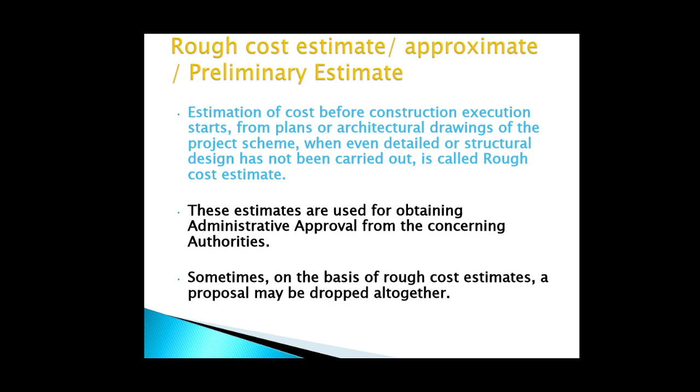Sometimes, on the basis of rough cost estimate, a proposal may be dropped altogether. It is very important to give the rough cost having variation in between 5 to 10%. If it has more variation, it may be dropped out because of higher cost.

Method of preparation of preliminary or approximate construction cost estimation for studies of various aspects of work of project and its administrative approval is discussed. This estimate can decide, in case of commercial projects, whether the net income earned justifies the amount invested or not. The approximate estimate is prepared from practical knowledge and cost of similar type of works.

The estimate is accompanied by a report duly explaining necessity and utility of the project, along with a site or layout plan. A percentage of 5 to 10% is allowed for contingencies, meaning in execution work there may be some unforeseen conditions like weathering conditions or shortage of material or labor. For that, 5 to 10% variation is acceptable.

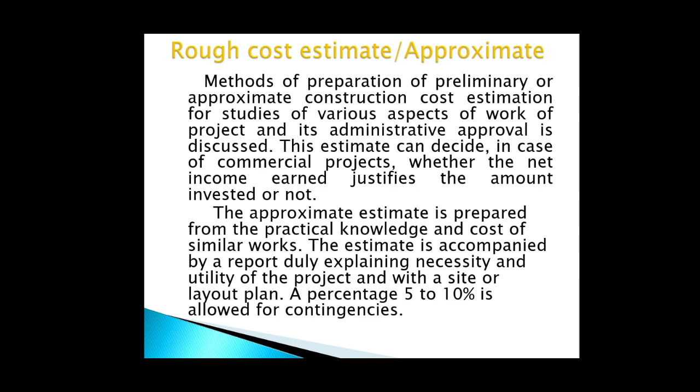The methods of approximate construction estimate are as follows. First is plinth area method, which as the name suggests depends upon the area of construction. Second is cubical content method, in which area as well as height, the third dimension, is also considered for calculation. Third is unit based system, in which units of calculation are considered, such as number of beds, number of students, etc.

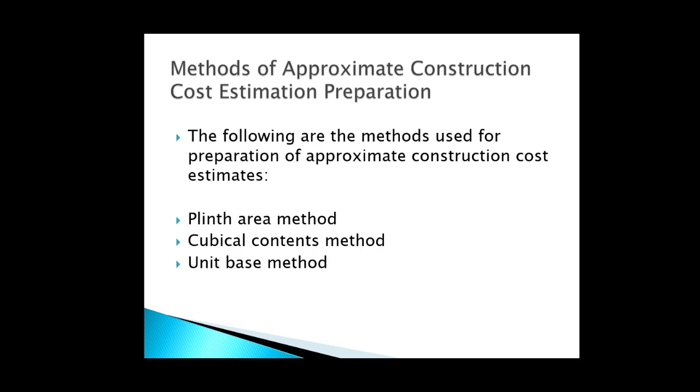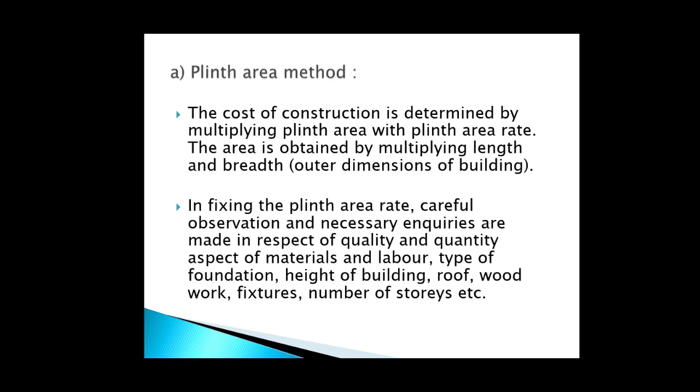We will discuss first about plinth area method. The cost of construction is determined by multiplying plinth area with plinth area rate. The area is obtained by multiplying length and breadth, that is outer dimension of building. In fixing the plinth area rate, careful observation and necessary inquiries are made with respect to quality and quantity aspects of materials and labor, type of foundation, height of building, roofing, woodwork, fixtures, number of stories, etc.

The example on plinth area method: prepare approximate estimate of a public building having plinth area equal to 1800 square meter, and the data given is plinth area rate at rupees 3500 per square meter.

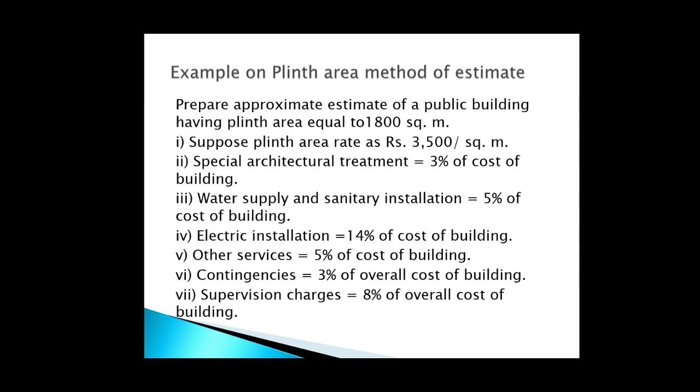The special architectural treatment required is 3% of cost of construction of building. Water supply and sanitary installation is 5% of cost of building. Electric installation is about 14% of cost of building. Other services are 5% of cost of building. Contingencies, that is rise or fall of material cost and other weathering conditions, is 3% of overall cost. Supervision charges are up to 8% of overall cost.

From above data, we can easily calculate the cost of construction by multiplying plinth area by its rate per square meter. The rate per square meter given is 3500 rupees and plinth area is 1800, so the multiplication gives total cost of 63 lakhs. Second, for special architectural treatment, the given percentage of cost is 3% of cost of building.

That is 3% of 63 lakhs, which gives the cost of 1 lakh 89,000. Similarly, for water supply, 5% charges are kept aside, which gives amount of 3 lakh 15,000 rupees. For electric installation, 14% of the total amount of construction, that is 63 lakhs, gives amount of 8 lakh 82,000.

5% for other services gives a cost of 3 lakh 15,000. The overall cost is calculated by adding all the above costs, that is cost of construction, special architectural treatment, water supply, electric installation and other services.

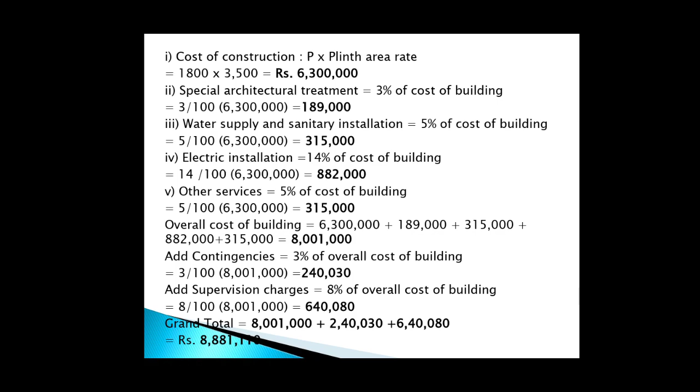Similarly, in the cubical content method, this is similar to the plinth area method, but in this method the third dimension, that is height, is also considered. This method is generally used for multi-storied buildings. It is more accurate than the other two methods, viz. plinth area method and unit based method. The cost of structure is calculated approximately as the total cubical content volume of the building multiplied by the local cubic rate.

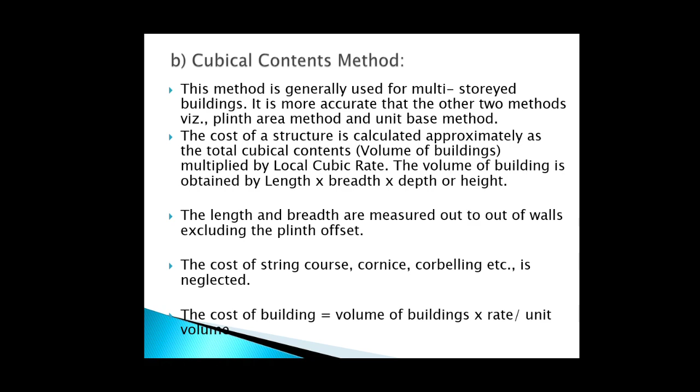The volume of the building is obtained by multiplying its length, breadth and depth or height. The length and breadth are measured out-to-out of walls excluding the plinth offset. The cost of string course, cornice, corbelling, etc. are neglected. The cost of building is equal to the volume of the building into rate per unit volume.

And third, the method of approximate estimation is the unit based method, also called the service unit method. According to this method, the cost of structure is determined by multiplying the total number of units with the unit rate of each item. In case of schools and colleges, the unit considered is the students.

In case of hospitals, the unit considered is the bed. In case of other buildings like apartments, the unit considered is flats, and such units are taken for calculation.

The unit rate is calculated by dividing the actual expenditure incurred, or the cost of a similar building in the nearby locality, by the number of units. This means for calculating this base unit rate, we have to first study a similar type of building in the same locality having the same specification.

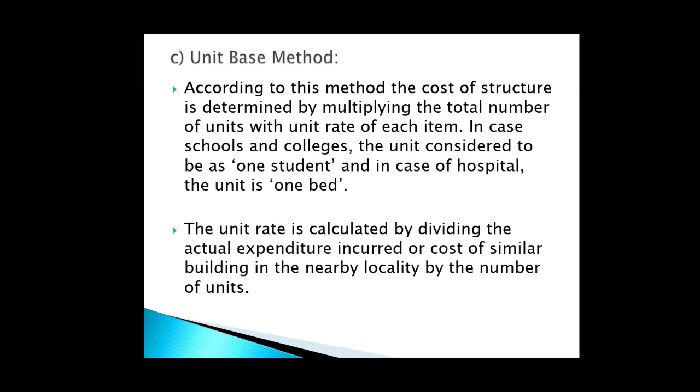Then, and only then, can we get an idea about the rate per unit, and that rate per unit we can directly apply to the number of units, and we will get the total cost.

What is unit cost? Unit cost is worked out for projects similar to the project under consideration, carried out recently in nearly the same site conditions. Unit cost means the cost of execution of a unit quantity of the work.

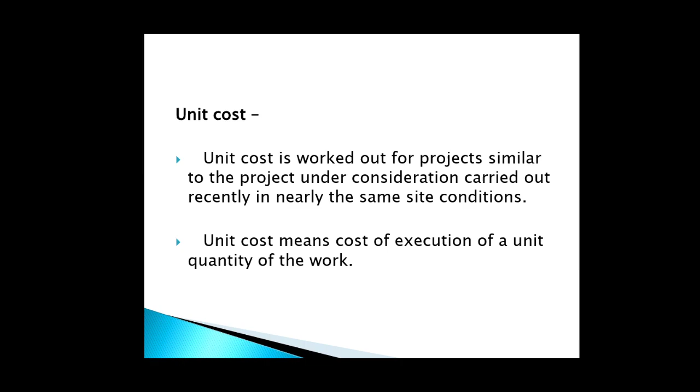To find the rough cost of any project, this average unit cost is multiplied with the total quantity of the present work in the same units.

For example, in case of a building, the plinth area in square feet of the proposed building is worked out, which is then multiplied by the cost per unit area, that is rupees per square feet, of a similar building actually constructed in the near past under nearly the same site conditions, specification and locality, to find out the rough cost estimate of the building.

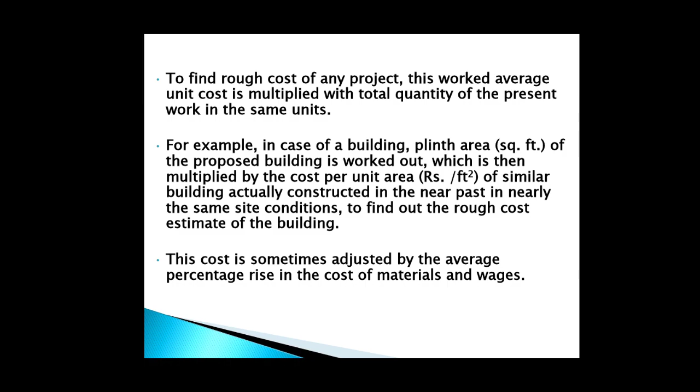And from this cost we can get the cost per unit required. This cost is sometimes adjusted by the average percentage rise in the cost of material and wages.

The rough cost estimate may be prepared on the following basis for different types of projects. Cost per square feet of covered area, that is plinth area, is the most commonly adopted criterion for preparing a rough cost estimate. For most residential buildings, it is adopted.

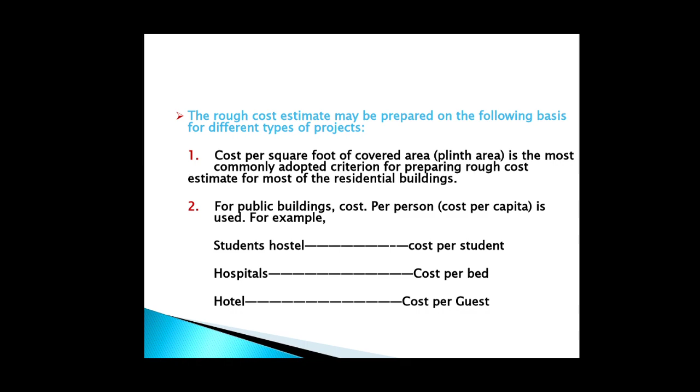And second, for public buildings, cost per person or cost per capita is used. For example, for a student hostel, the cost per student; for a hospital, cost per bed; for a hotel, cost per guest or cost per table.

What is rough cost estimate? The cost per cubic feet is particularly suitable for commercial offices, shopping centers, factory buildings, etc. For water tank reservoir, cost may be worked out on the basis of capacity in gallons of water stored. For that, the cubical content method is best suitable method.

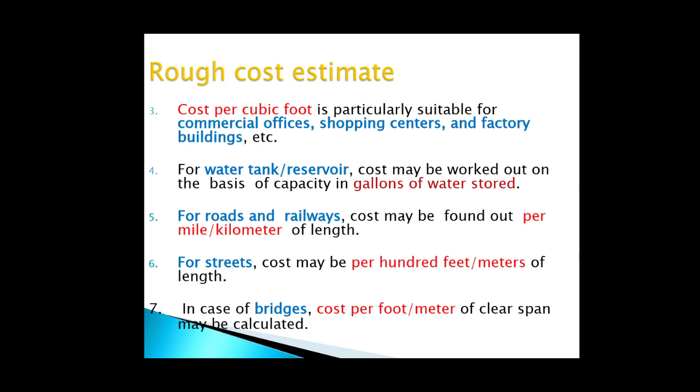For stretch of road, it is calculated by single dimension, in miles or kilometers. For street, it is in 100 feet or meters or kilometers. For bridges, it can be calculated by measuring the dimension or number of clear spans available.

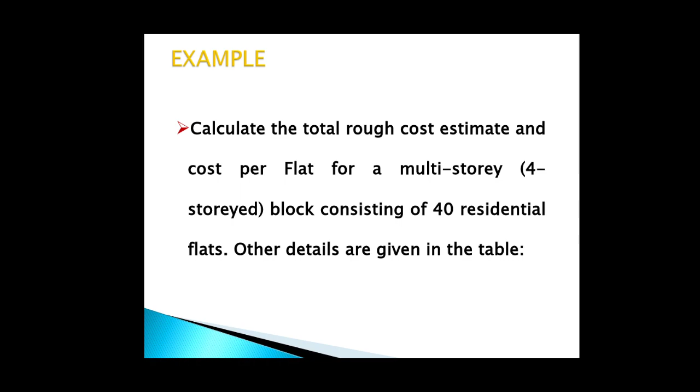One example for approximate estimate or rough cost estimate: the data given for example solving is to calculate the total rough cost estimate and cost per flat for the multi-story building, a 4-storied block consisting of 40 residential flats. Other details are given as follows.

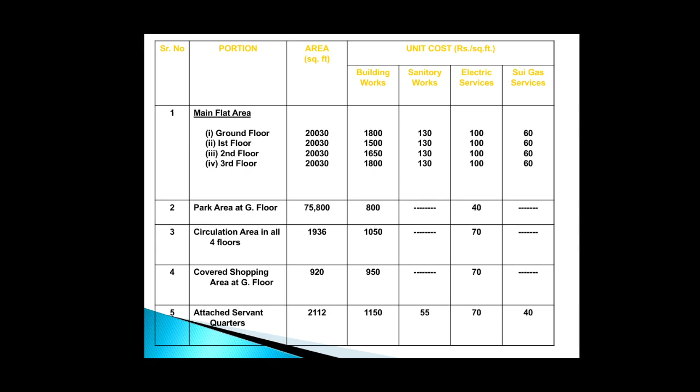In addition to above cost, the sum of costs for big projects for road walkways is 15 lakhs, landscaping 12 lakhs, external sewerages 7 lakhs, external water supply overhead and underground water tanks with pumping machinery for each set of flats 19 lakhs, external electricity 3 lakhs, boundary wall 6 lakhs, miscellaneous unforeseen items 8 lakhs, add 6% development charges and 3% consultancy charges.

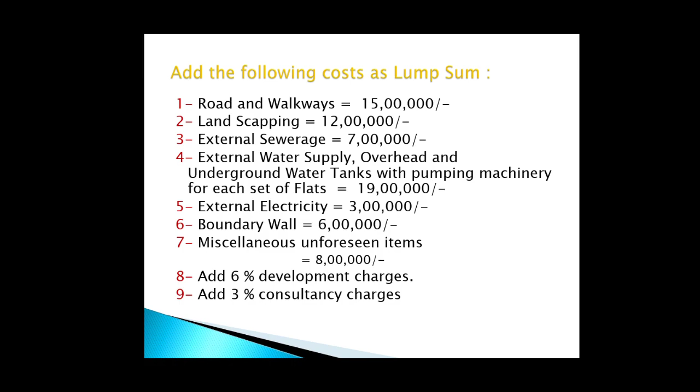From the above data given, we can easily calculate by multiplying the given values.

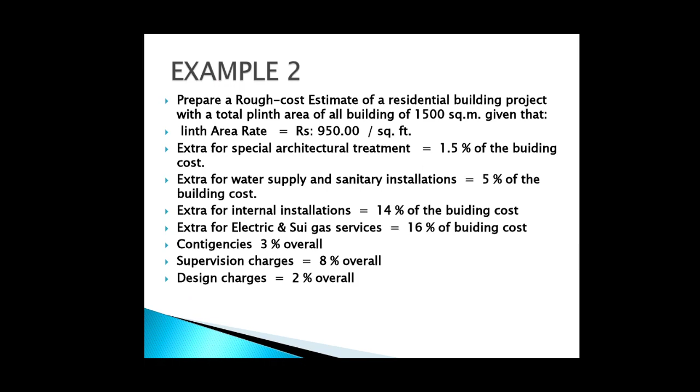In another type of example for rough cost estimate, the data given is area of plinth of building, its cost per square feet or square meter, the extra special architectural treatment as given in previous problem, extra for water supply, internal installations, electric and gas services, contingency charges, supervision charges, design charges, and overall consultancy charges.

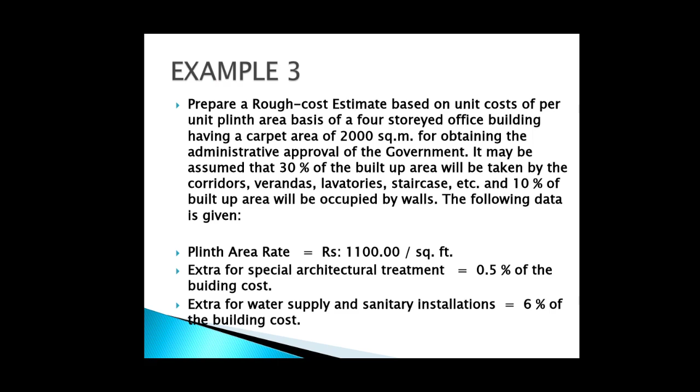Now, by using all the data, we can easily calculate by simple multiplication and addition of all these costs, and we can get the cost required for completion of project for administrative approval.

Now we will discuss about detailed estimate, which is the most important topic for engineering, because for completion of any project the detailed estimate is necessary. Without detailed estimate we cannot complete a project smoothly, because it will give each and every idea about quantity of material required, at which stage how much quantity is required, and other things.

The detailed estimates are prepared by carefully and separately calculating in detail the cost of various items of the work that constitutes the whole project, from the detailed working drawings after the design has been finalized. Any mistakes in a rough cost estimate are eliminated in the detailed estimate. The detailed estimates are submitted to the competent authorities for obtaining technical sanction.

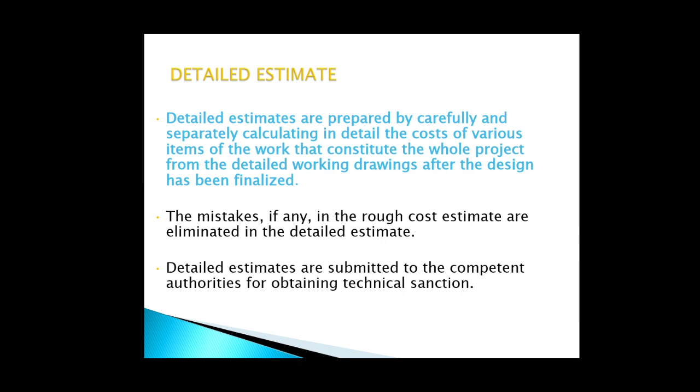In the detailed estimate, the whole project is subdivided into different items of work or activities. The quantity for each item is then calculated separately from the drawings as accurately as possible. This procedure is known as taking out of quantities, also called measuring the quantities, and for that we are using measurement sheets.

The quantities for each item may be estimated and shown in the pattern which is called bill of quantities, generally called BOQ, and for that we are using the sheet called abstract sheet, in which all quantities worked out are multiplied by rates of material and labor. The unit in which each item of work is to be calculated should be according to the prevailing practice as followed in various departments of the country.

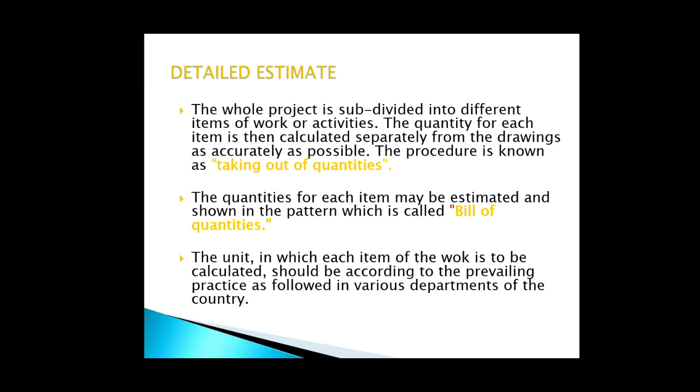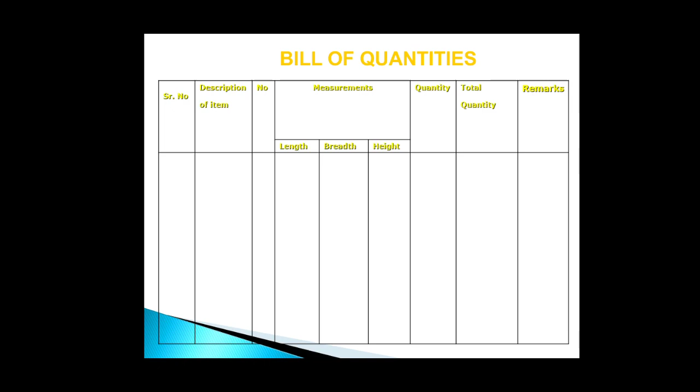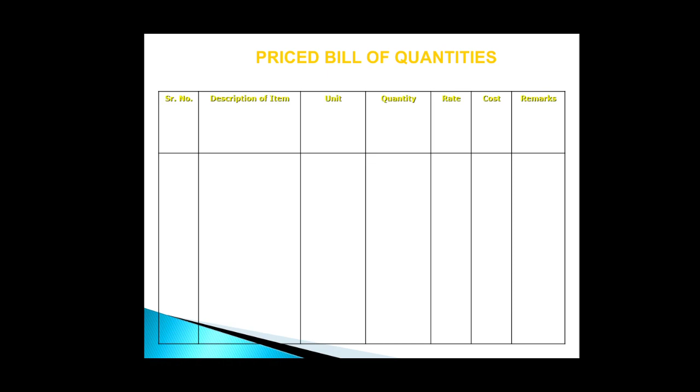Now, from all the above things, it is clear that estimation is more important for administrative approval as well as technical sanction. In the next lecture, we will discuss in detail about detailed estimate.